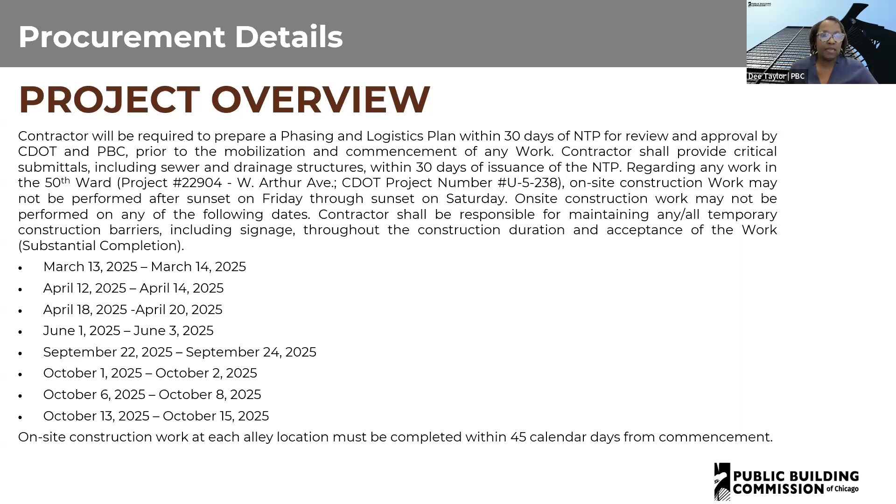Time of completion. First, we'd like to point out that substantial completion must be achieved no later than November 28th, 2025.

You cannot start any sooner than May 13th, 2025, and you must complete it by June 30th, 2025. Substantial completion, which includes alley reconstruction and associated work, cannot start any sooner than July 1st, 2025, and must be completed by November 28th, 2025.

Schedule milestone number 2 is new landscaping. It cannot start any sooner than October 1st, 2025, and must be completed by November 28th, 2025.

There are also liquidated damages associated with this project. If you fail to achieve substantial completion, you will be charged $1,500 per day in liquidated damages, also known as LDs. There will be $500 per day assessed for failure to achieve scheduled milestone dates, the 2 that I've just mentioned.

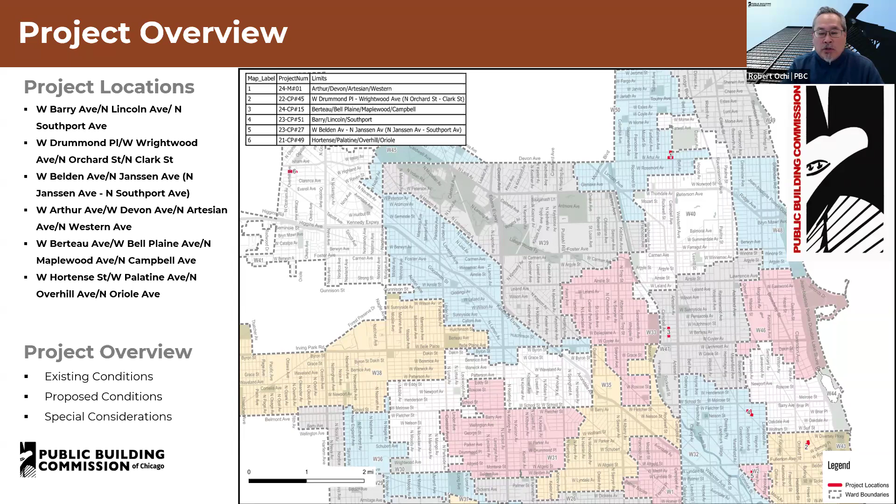I'm going to be handing it over to Demille Cox. He's the engineer of record, and he's going to give a brief overview of existing conditions, proposed conditions, and special considerations for each alley location. So with that, I'm going to hand it over to Demille. Demille, you could start off with West Barry Avenue.

Yeah, thank you, Robert. West Barry Avenue, Lincoln Avenue, and North Southport Avenue. This alley will probably be the bigger of the 6 on the list. Conditions, as you can see, deteriorating pavement, utility poles in the right-of-way, mix of residential and commercial. And then we do have a construction work caution area.

This will be explicitly called out in the plans, and on the plan sets as well, you can read through, and there should be soil reports to show you how deep down, but nothing too major. It's just minor lead, and as long as you wear the proper PPE, you should be fine. There are 2 other alleys on this list that will require PPE or have the CWCA.

This alley happens to also have existing asphalt parking area in the middle of it, so keep that in mind as you perform construction. You'll build the alley as is, and then do some minor touch-ups of HMA to match what's existing there.

Coordination will be heavily required for this one, so be aware of that as well, and this is a pretty busy area. Well, the north side in general is just pretty busy. There is an existing ComEd manhole near Southport.

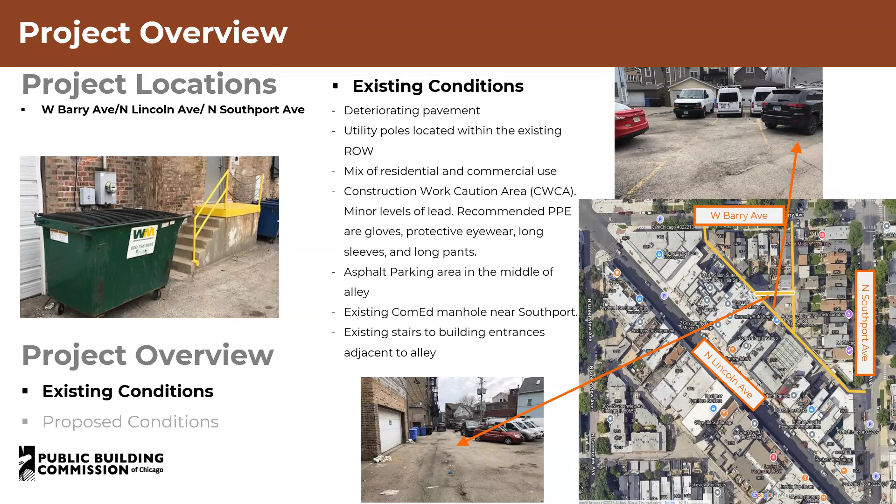All right, proposed conditions, sheet flow. The manhole near Southport, there's no drastic elevation change. I think it's to the hundredth place, as you can see, 0.87 versus 0.86. So no adjustment is required for this. And then installation of rubber speed humps throughout the alley, which are also called out.

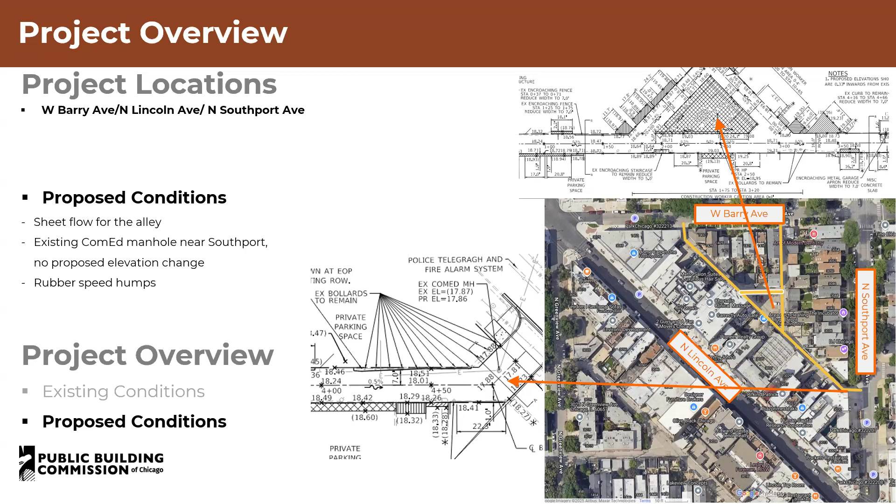Next slide. All right, West Drummond, Wrightwood, Orchard and Clark. So this is near Alcott Elementary School. This may be pushed toward closer to summer. The school may want this to be scheduled when kids are not around, but we will address that accordingly.

But existing, there are speed humps, all that will be removed. Existing right-of-way or utility poles and dumpsters, CWCA, like I mentioned from the first slide. No existing catch basins. Next slide.

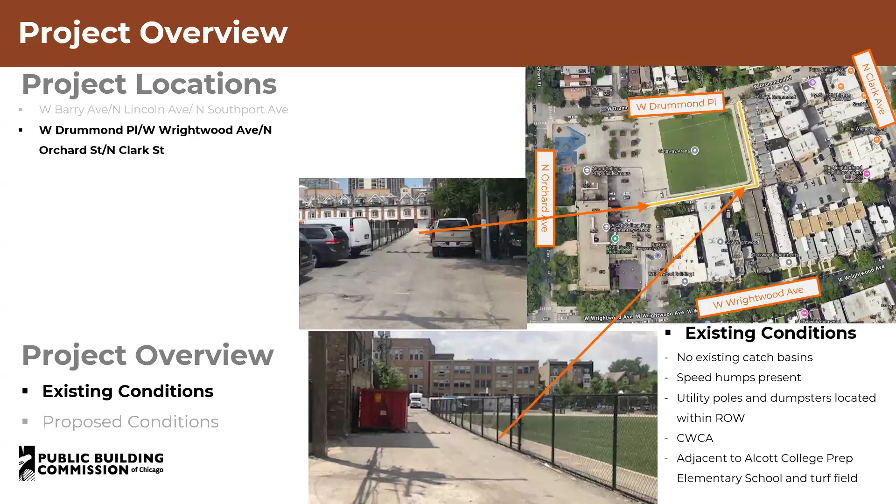So we will be putting in some, this will be half brick paver and half sheet flow. We will be putting in a 30-inch reinforced concrete pipe, roughly 302 feet. There will be 4 reducers. We'll also do some 18-inch extra strength vitrified clay pipe, roughly 20 feet, and then another 8-inch of roughly 72 feet. We will be connecting to the 15-inch sewer on Drummond.

There should not, for this connection, be anything other than a normal core. You shouldn't need a Y connection at all. Shouldn't need a Y connection for any of the alleys on the list.

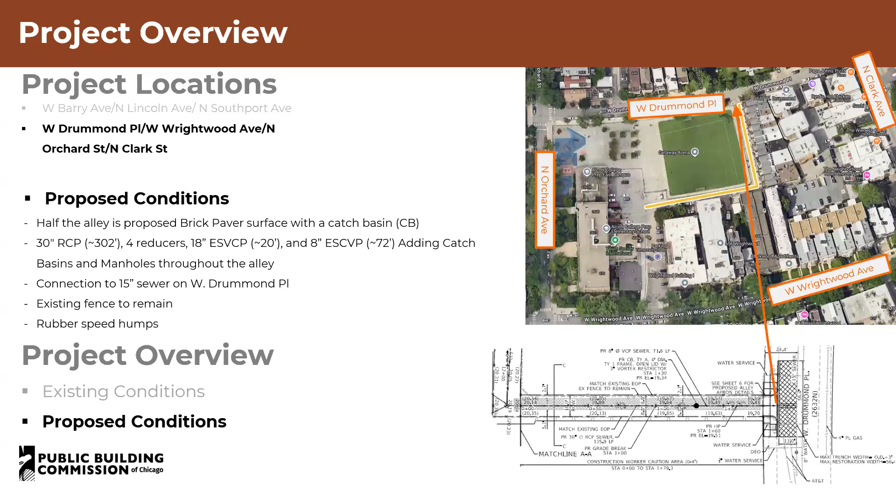Existing fence is to remain, so please proceed with caution. And then rubber speed humps are required. Rubber speed humps will be required on every alley on this list. All right, next one.

All right, Belden, Janssen, Southport. This one has deteriorating pavement, utility poles in the existing right of way, and there appears to be a clogged catch basin. I believe DWM has already come through and cleaned this out, but please verify. This will need an adjustment, which is within our scope of work, shown on the next slide. There will most likely be an allowance needed near Belden.

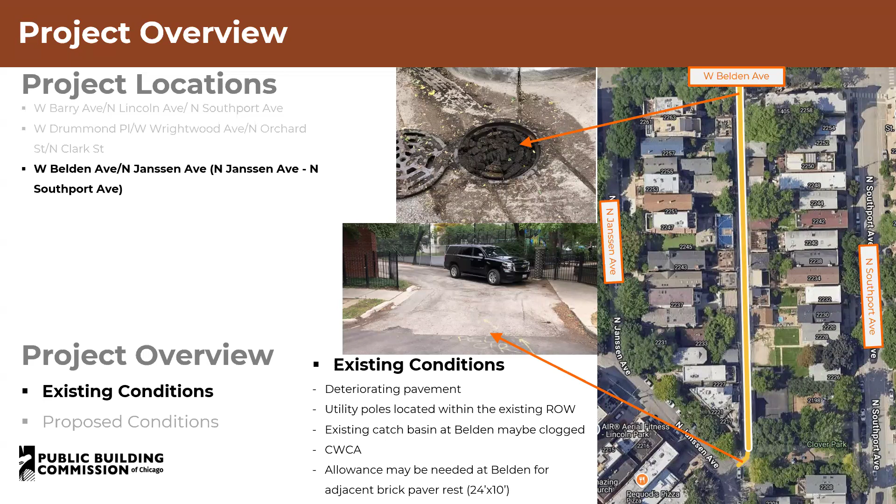Noticed a couple of days ago that there were brick pavers installed through another contract. The area is roughly 24 by 10. Next slide.

Proposed conditions: 8-inch extra strength vitrified clay pipe, roughly 364 feet, and one catch basin. Rubber speed humps throughout the alley. Next one.

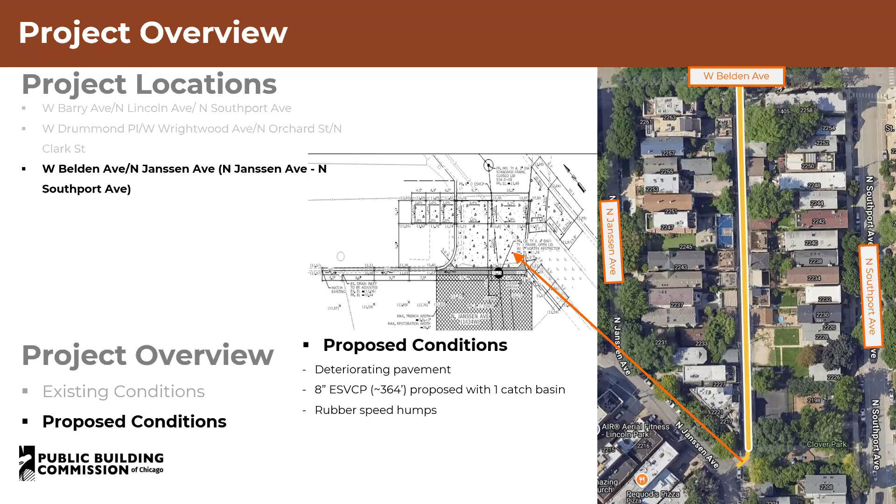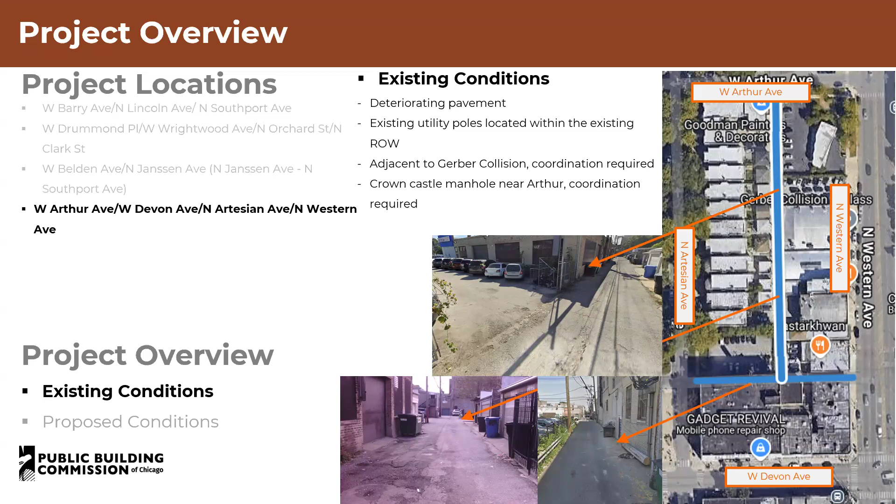That east-west leg we will not be touching. We are just tying into the existing. Next slide.

We're proposing sheet flow. There is a Crown Castle manhole closer to West Arthur that will need adjustment. Coordination is needed. As mentioned, the east-west leg we are not touching; we are just matching the existing edge, and then rubber speed humps throughout.

Next slide, please. Berteau, Belle Plaine, Maplewood, and Campbell. Like the other two, deteriorating pavement and existing utility poles. There also happens to be a tree, literally right next to that utility pole. It's kind of hard to see, but there's a photo right there. Both are staying in place; we will build around them accordingly.

The existing condition has no drainage structures currently; it's currently sheet flow. Next slide for proposed conditions. We will keep it as sheet flow, with rubber speed humps. This alley should be pretty straightforward.

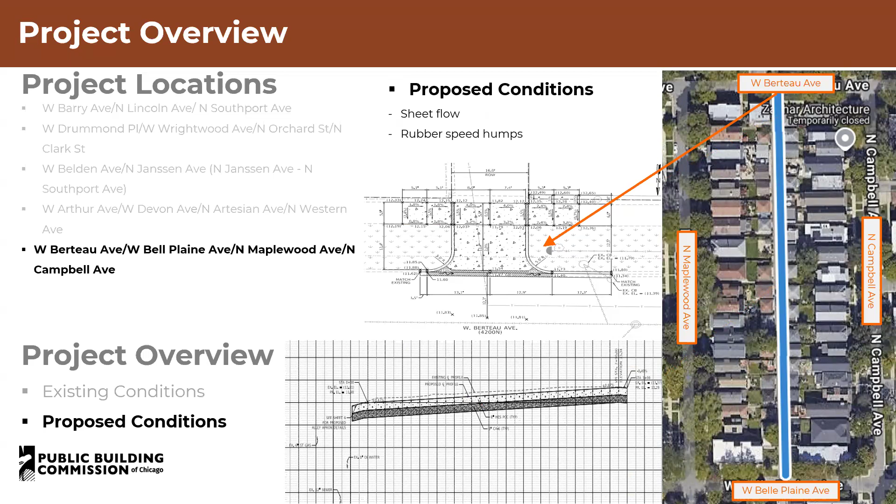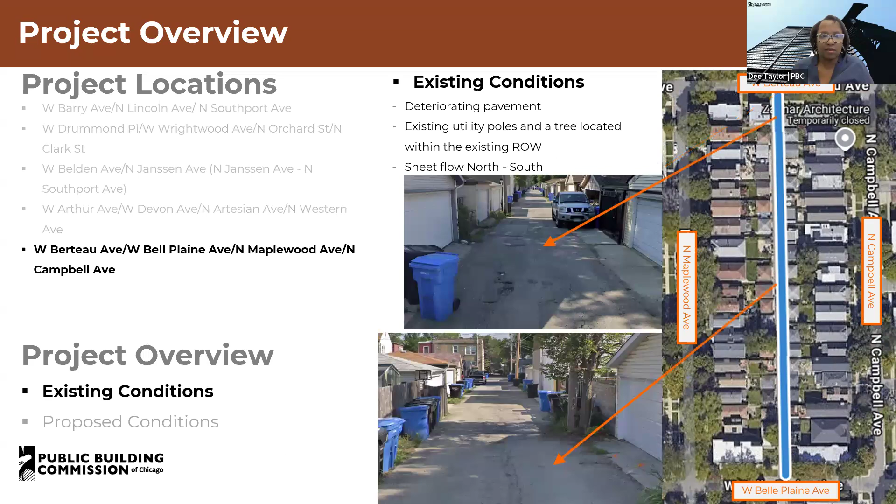Sorry, one thing - can you go back to Arthur? For Arthur, this is in the 50th Ward. We need to adhere to the Jewish holidays in the area, so no construction will fall on those days. We will provide a list of those holidays and when work should not be performed.

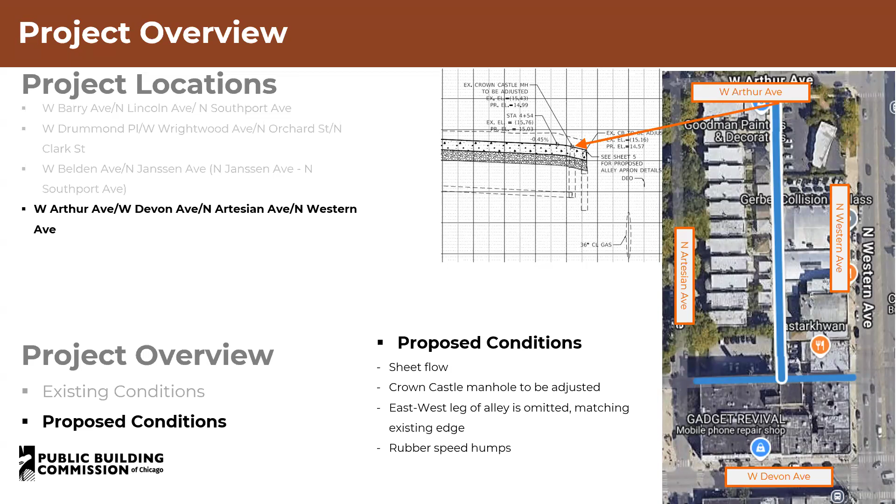The last alley: Hortense, Palatine, Overhill, and Oriole. Deteriorating pavement, sheet flow east-west, existing 3-inch key, utility poles in the right-of-way, and a manhole and alley apron at Overhill. This is not connected to any existing sewer. This one runs north and south along Overhill, but we will be doing an adjustment here.

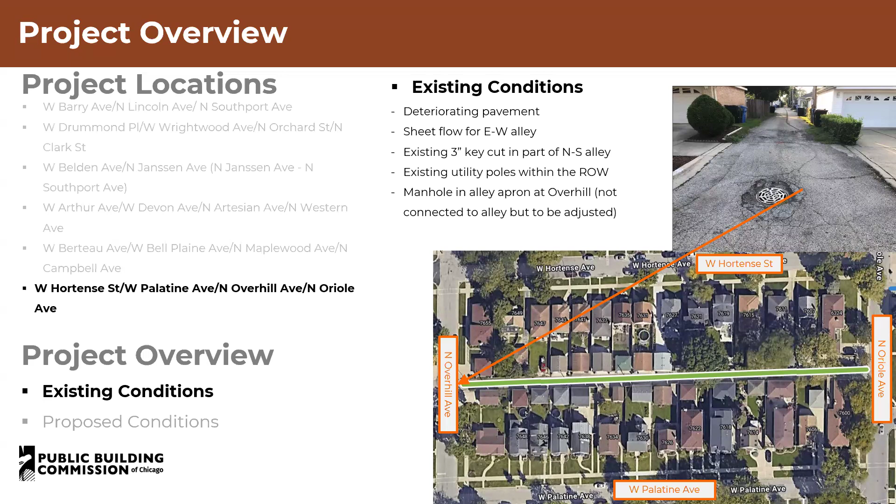Next slide. So sheet flow for half the alley, and we're proposing 8-inch ductile iron pipe. There are some utilities near Oriole where we make the connection that will be crossing, which is why the DIP is required, along with a water main - it's kind of hard to see here. Along with some extra strength vitrified clay pipe, rough lengths are as shown, and we'll be making a 24-inch connection on Oriole, with rubber speed humps throughout the alley.

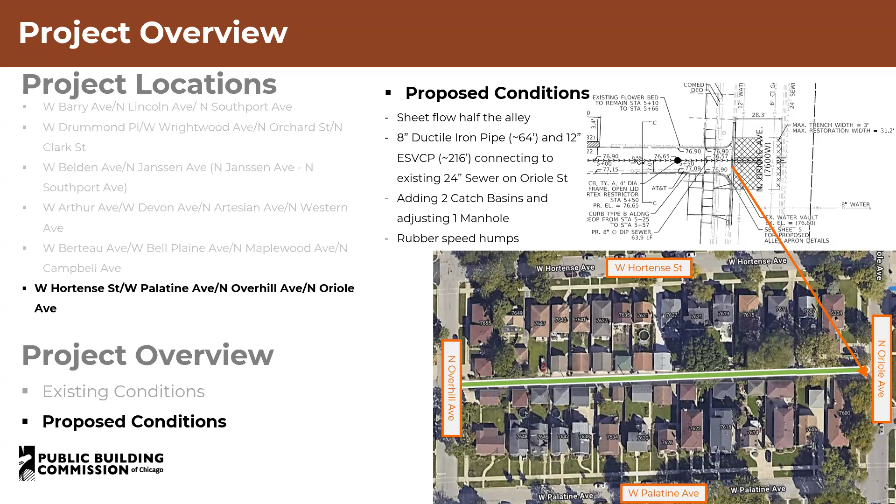With that, that's all I have for these six. Thank you, Jamil, and thank you, Robert, as well.

Okay, we are at the end of our presentation at the Q&A portion. Are there any questions? At this time, there are no questions in the chat, Dee.